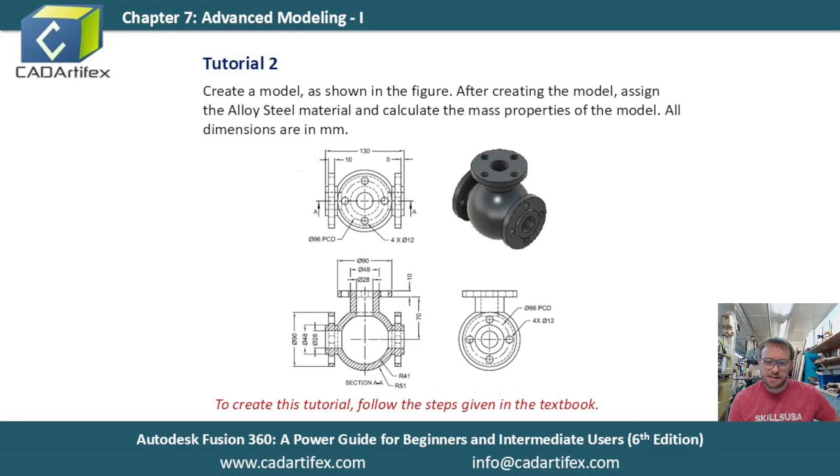We are creating a model that looks like some sort of plumbing valve. It has three different parts, so there's a lot going on, but just try and stick with me. It's not actually that hard to create, it just has a bunch of steps. So jumping into Fusion, we have just a new file. I'll save this, chapter 7, tutorial 2, and we're ready to get started.

So to get started, I'm going to start a sketch on this front plane. I should have had this pulled up in the book before I started, but here I am looking for it. So anyway, we're going to get started, and we have kind of like the main sphere in the middle and the two side flanges.

Those can be done in a revolution, so I'm going to draw the sketch of that. Really there's symmetry right to left, so I only need to create half of that. I'm going to create two center lines, a horizontal one and a vertical one. Those will form the basis of reflections, and this horizontal one will form the axis for the revolution after I draw it.

So I'm going to start drawing, and I can just draw this shape. This is probably around 10-ish. I'm just going to rough it out though, kind of get the shape in here and add the dimensions afterward.

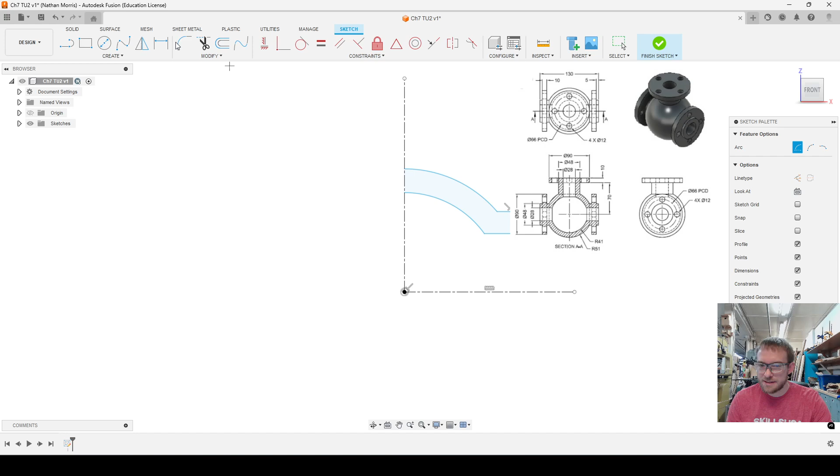And I come over here. So you can see I have this rough shape, and then I need some center point arcs. So I'll go from here up to this line, then extend the center line up a little bit, and do another center point arc from here up to here. So you can see that area is blue, it's fully surrounded. Let me move my view a little bit so you can see all of it.

So that's good, now I just need to start adding in dimensions. The good thing about defining this as a center line beforehand instead of a construction line or solid line, is if I dimension from one of these lines to the center line, it does the overall size, and that's what I want - the overall diameter of my finished revolution.

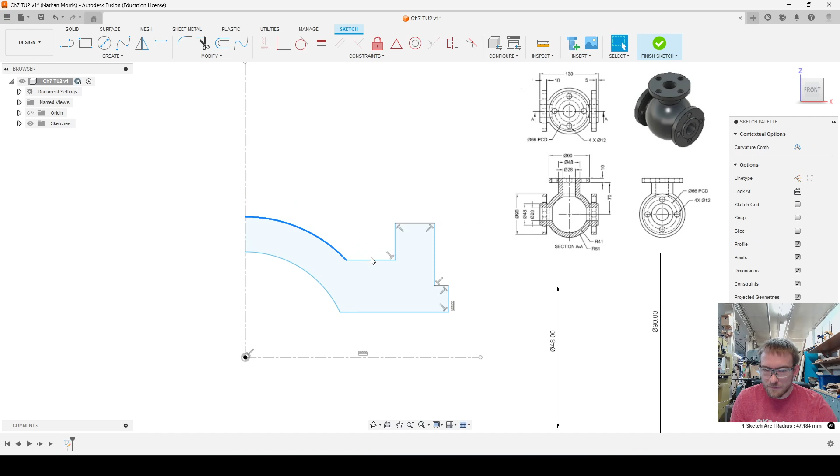So this is going to be 90. This is going to be - oh, hit that wrong. D for dimension, click on that one, click on that one. Okay, this one's going to be 48, and I got things kind of a little out of whack here. This line needs to be collinear with this line, and then we also know that this is 28.

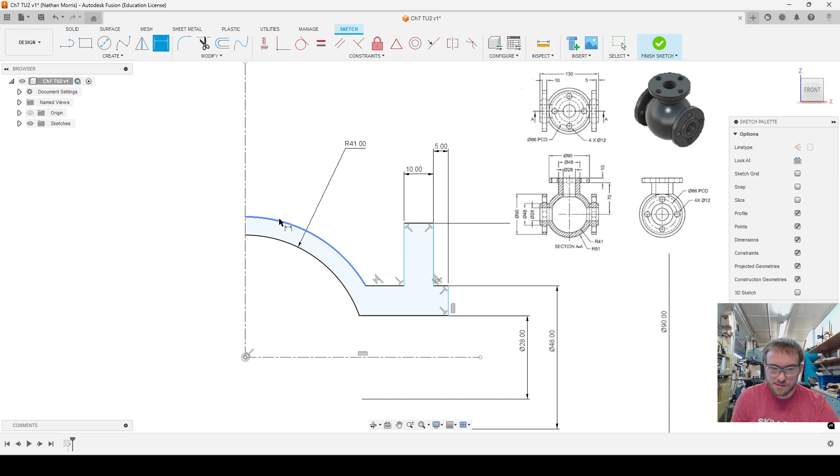Now some horizontal dimensions. This is 10. This is 5. And then this radius is 41, and this radius is 51. And then we also have that the whole distance is 130, the horizontal distance. So I'll do that - is 130. All right, so with that done, everything's defined.

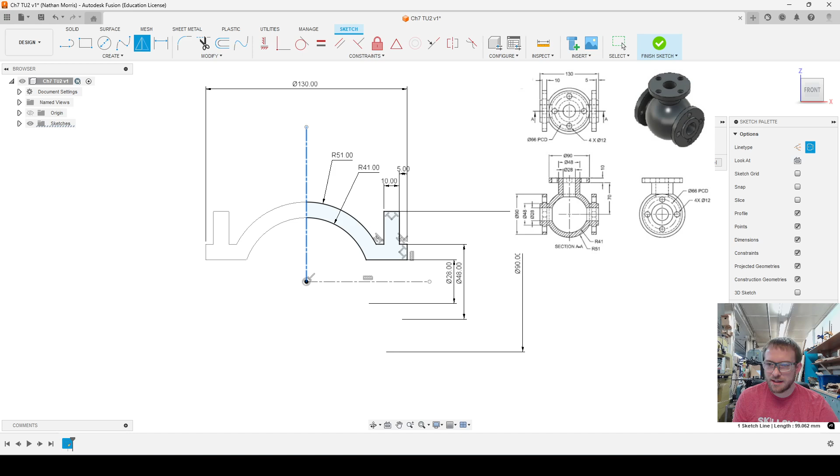I can double click on this section, and on one of those lines it selects everything that's connected to it. It's a chain connection, and I can reflect that using the mirror tool. I can select the mirror line as this line, and you see how it reflects over there. And that's it, so I can hit finish sketch, and then now we're going to revolve this shape.

So I need to select both halves of this and select the axis as this one. And it defaults to 360 degrees, which is perfect, that's what we want. So I'll hit OK.

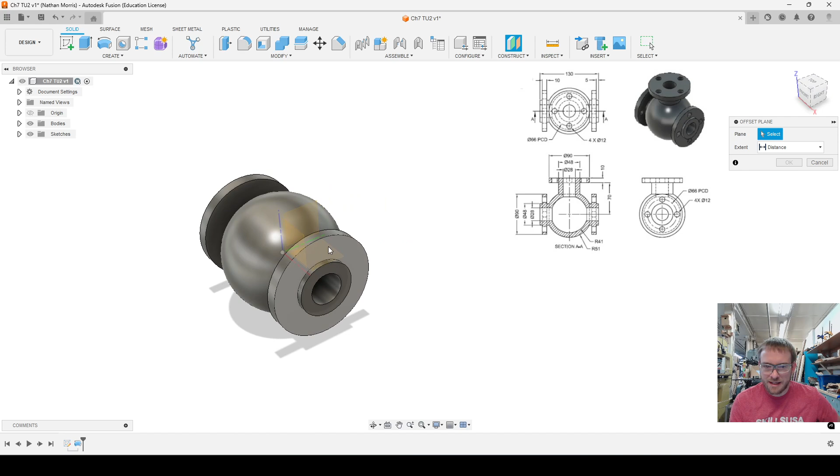And now I'm ready to work on that top flange part. So what I need to do is create an offset plane. That's this option right here, or you can do the drop-down menu and go to offset. I need to select my origin bottom plane. Pro tip, if this is giving you trouble, you might be able to rotate your view to get at it, but I can't point at that, right? So I can hide the body.

I can hide that, and now I can click on this and then unhide it, and now I can do my offset plane. So this is an offset a distance of 70 millimeters, and now I can create a sketch on that plane. So now I'm just making a circle of diameter 48.

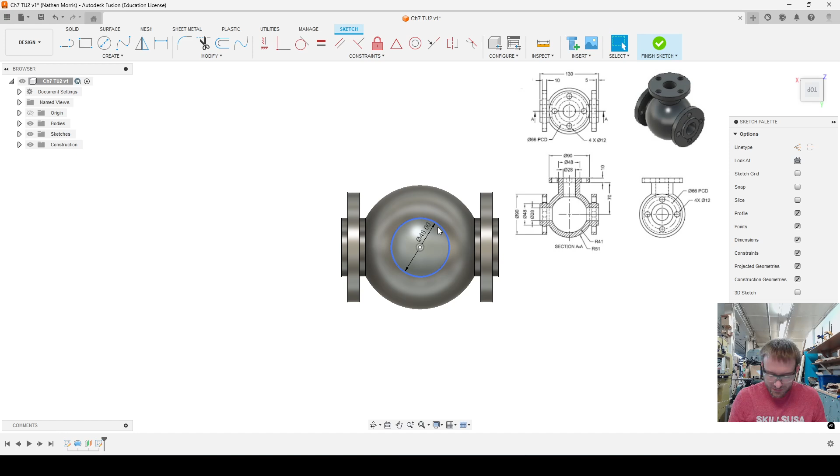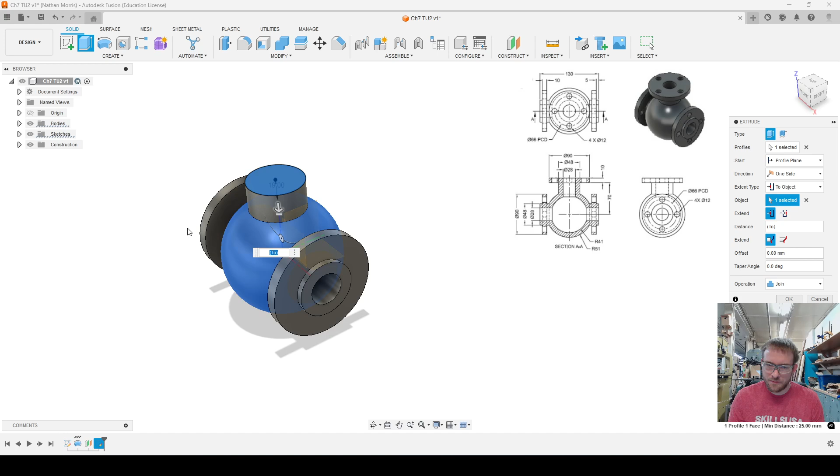That's it. Hit E for extrude, and now instead of distance, I'm going to object, and I want to select that sphere as the object. So it will default to the right options. I want the selected face. I don't want it going through that shape, I just want it going to it. So it's going to just stop as soon as it hits the sphere right below that.

So that's that. And then now on top of that, I can make another sketch up on top of this face for that flange part. And so this is a circle of diameter 90. I can hit E to extrude that, and that is 10 millimeters.

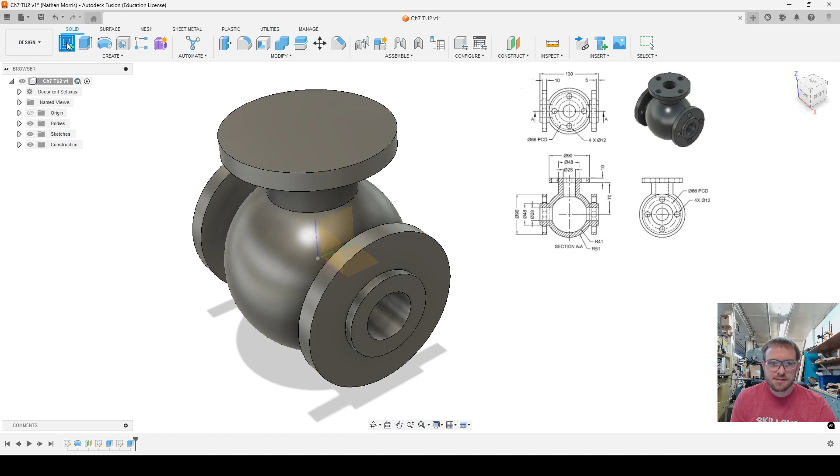Okay, and then now there needs to be a hole down through this opening into this chamber so that it's all connected space. So I'll do a sketch on top of that. Circle diameter 28. And then extrude, E, hotkey.

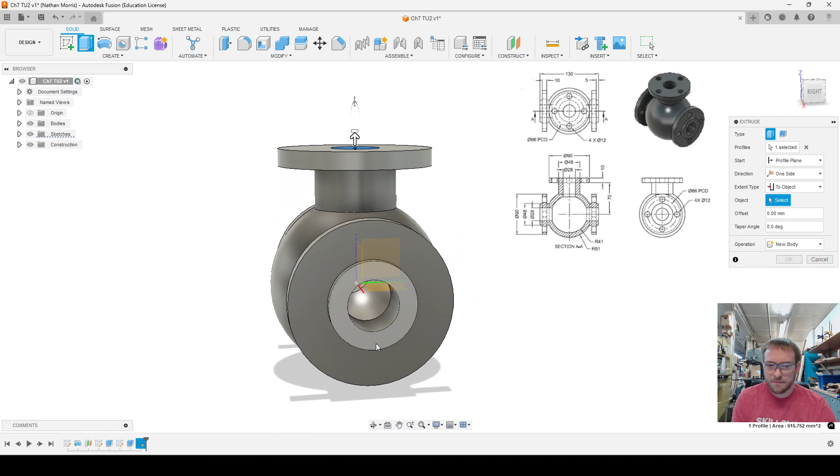And now I can go to object. Now this one's a little bit tricky. I want to get down to the inside face of this cylinder, right? So if I change my view and point in here, I can click on that inner face. Now you can see the red, it's like defaulting to cutting, which is what I want it to do. And if I hit OK, I can see that now it opens up into that spherical area.

These now connect, which is pretty cool. So that's how you kind of link several different shapes together like that to cut out that complex geometry. So now we need to make the kind of hole pattern over here. See on this flange, there's holes, so we need to do that. So I will create a sketch on this face on the right here. And so the holes are 12 millimeters in diameter.

Need to make this be vertical with the origin. I'm going to start at the top, and then I'm going to do a circular array around. And then this distance is 33 millimeters.

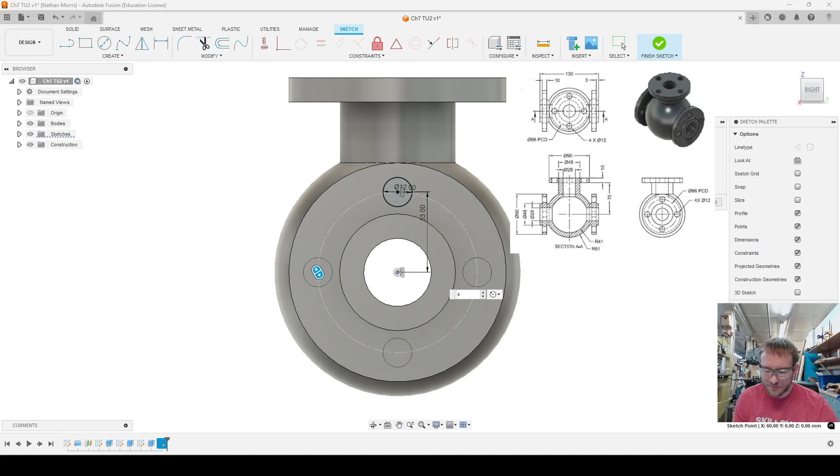So now that is fully defined, and I can just select the circle, go over to the create drop-down menu, select create, or select circular pattern, and then I can select my center point, and then I just have to say how many of those I want. I want 4, so I'll hit OK, finish sketch, extrude, select each of those.

And the book says to do -10, but you could also do like to the other face, same thing, because this is 10 millimeters thick.

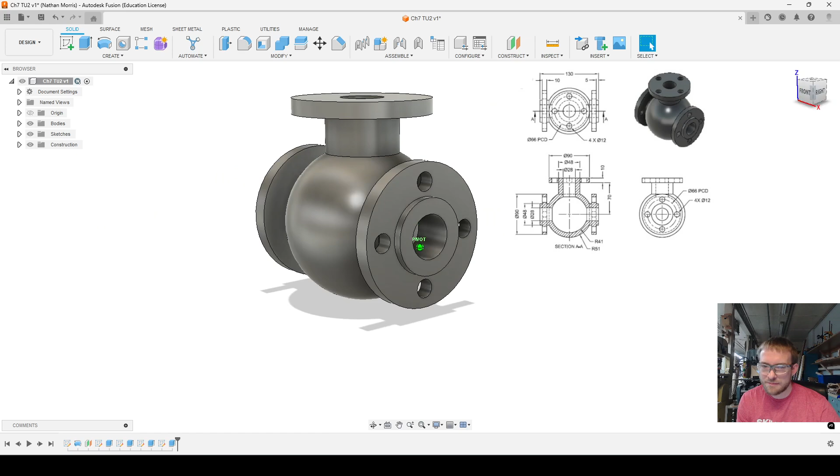I would generally actually rather click on this other face instead of saying 10, because that way if I was to change the dimension of how thick this is later, I could do that. I could go back into the extrude. Actually, it was this revolution, so I'd have to go back into the original sketch and change that dimension, but I could. And then the holes would automatically update if, rather than doing a measurement, I did to that face. But I did it the way the book says. I did -10 millimeters. I'll do it on this other side, I'll do it my way.

So over here, we're going to do the same thing.

We can just draw this again. I could probably mirror that feature over, but I think that's saved for the next chapter. So for now, I'll just do my 12 millimeter circle, make sure the center point is vertical with that, and that this distance is 33.

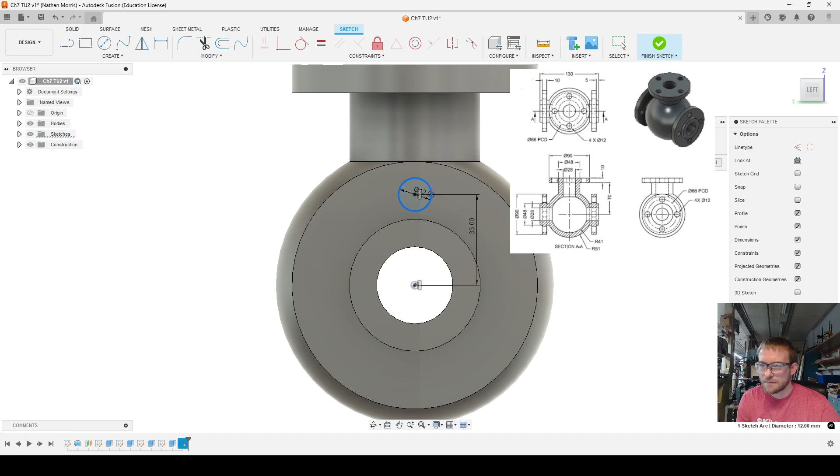And then circular pattern, center point, select, I want 4 of them, E for extrude. This time, instead of doing a 10 millimeter measurement, I'll click on this face. It's still doing a distance. Technically, I probably should do to object and then click on that face, but that's going to cut all the way through.

And then if I was to go back in my original sketch and change this to 15... oh, it doesn't like that. Oh, because everything else is locked in. It actually doesn't let me change that. Well, that's kind of annoying.

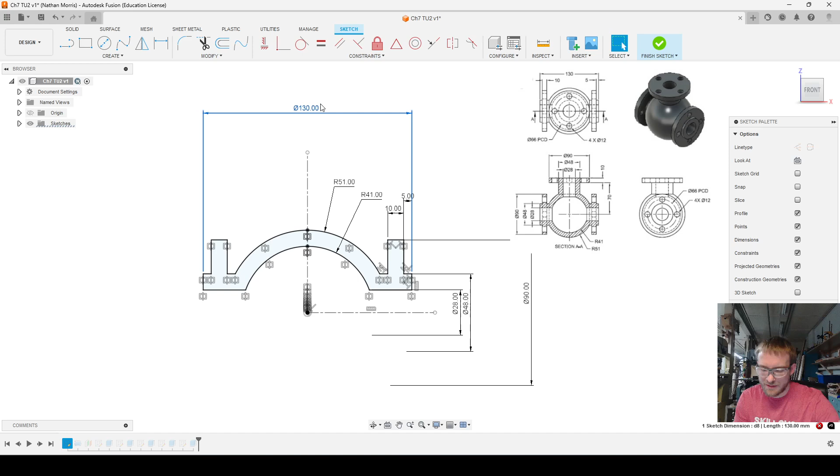Well, if I remove that constraint for a moment, I could finish my sketch and it would update, and see these holes don't go through, but the ones on the left do. That's because I defined this extrude as a specific distance on the right, but this one I defined as going all the way to that face. So even if that face moves, it updates.

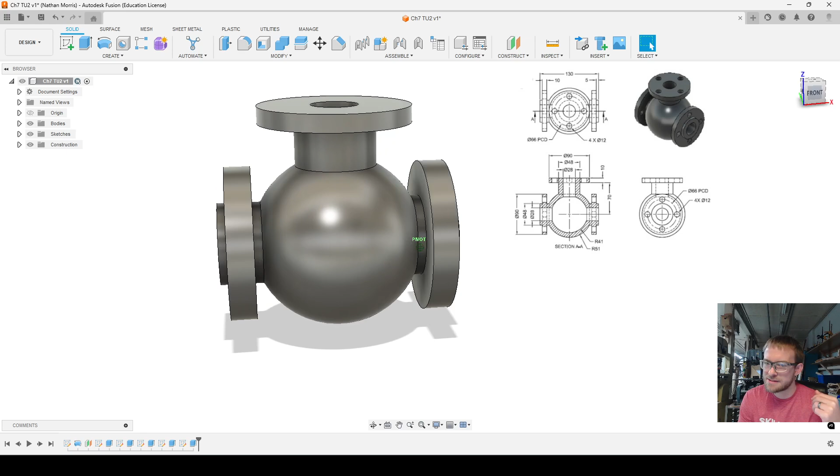So I don't want to mess up those dimensions, so I'll just hit undo until I'm back to where I was. All right, so then one more face that I need to do, and need to create holes on the top. So I will do the same thing as the others, create a sketch up here, create a circle, 12 millimeters, fix it vertically with the origin, and dimension that to 33.

I think it's still 33, right? Let me double check.

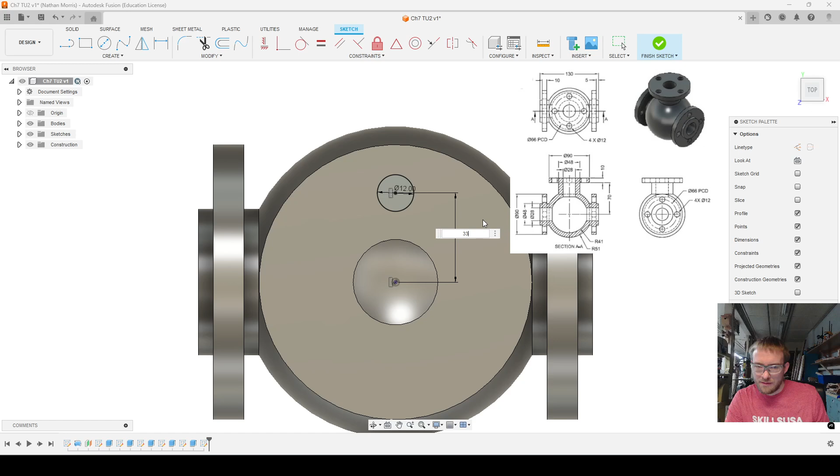Oh, the book does mention that it's valid to mirror the other things, so why don't I back up and show that?

So before I created these, I just created these holes. I could now mirror this feature. So when you go to mirror with nothing selected, I can choose bodies, faces, features, or components. I'm going to select features here, and then I'm going to select this down here in the timeline, this extrude. That extrude was making those holes.

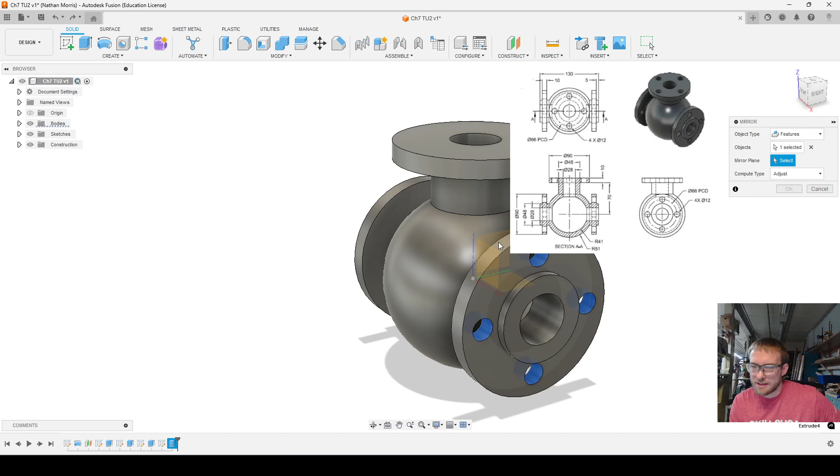And then I can select my mirror plane. And again, I can't—oh, I can actually. I can select that, or I could hide the body if I can't do that, and then do that. And now it automatically mirrors that across here since this is a symmetrical thing, and it'll do compute type adjust. I'll hit OK, and now it mirrors those holes over. So that was just another way to do that.

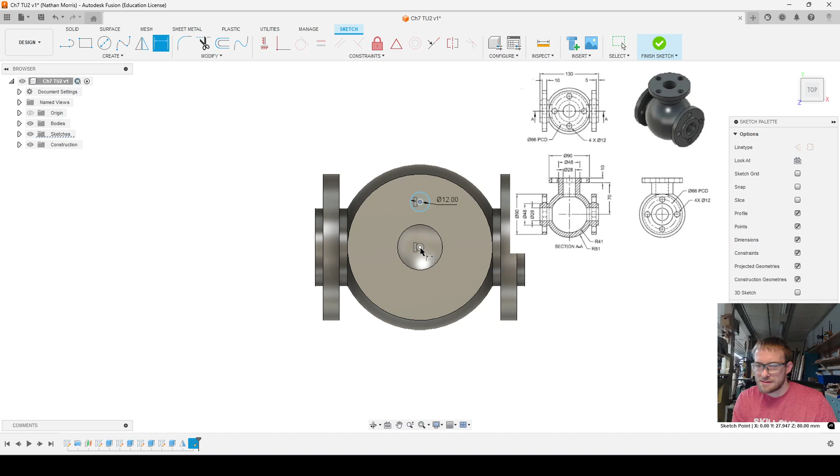So back up to here, recreating this part, I'll do a circle, and that's 12 millimeters. Make sure it's vertical, and the distance is the same—it's 33 millimeters. Circular array, or circular pattern, and center point, 4 of those, hit E for extrude, underneath, and just do it to that base, and hit OK.

Now I have holes in all of them, I have all my dimensions correct. This drawing overcomplicates it because it has it from all the different views, but if you don't have the step-by-step instructions, then you could kind of figure that out. It's not immediately obvious from the blueprint how you would go about drawing this, so hopefully this gives you an idea how you could tackle something like this.

The test drives, they don't give you the step-by-step instructions, so it might be a good idea for you to go ahead and follow along with this tutorial. Just go ahead and restart it and do step-by-step through this. You can kind of get a feel. The more of these you do, the more things you model, the more things you create, the better idea you get of how to do it if you were trying to do it from scratch on your own.